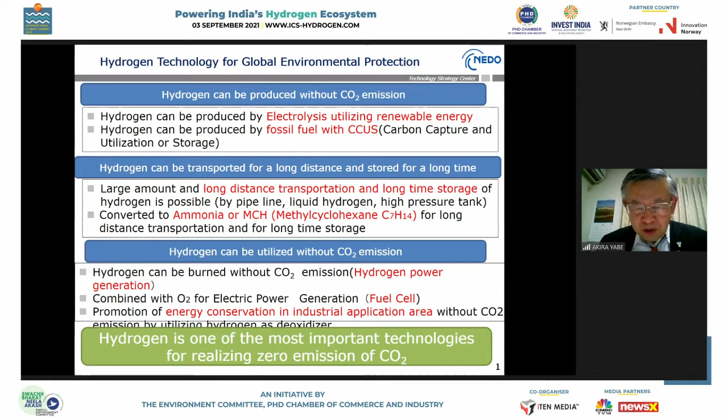Therefore, hydrogen is one of the most important technologies for zero emission of CO2.

This is an overview of hydrogen technology. Energy sources and production is the first one, and transport, storage and utilization. For production, fossil fuels and also renewable energies, and CCUS are very important factors.

For transport and storage, this is the main topic of today. Compressed hydrogen and pipeline is for a very short time range. Liquid hydrogen and organic chemical hydride, and ammonia, is for a very long range. And metal hydride is another application.

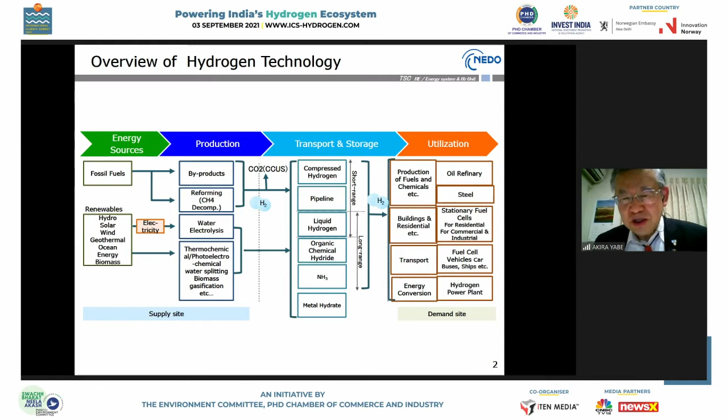I want to explain about the hydrogen strategy around the world. Basic hydrogen strategy was first established by Japan in 2017. That is very recent. And France, Korea, EU.

Germany, IEA publishes a strategy, and also India's powering India hydrogen ecosystem is today's topic, and the national hydrogen mission will be soon this year, I hope.

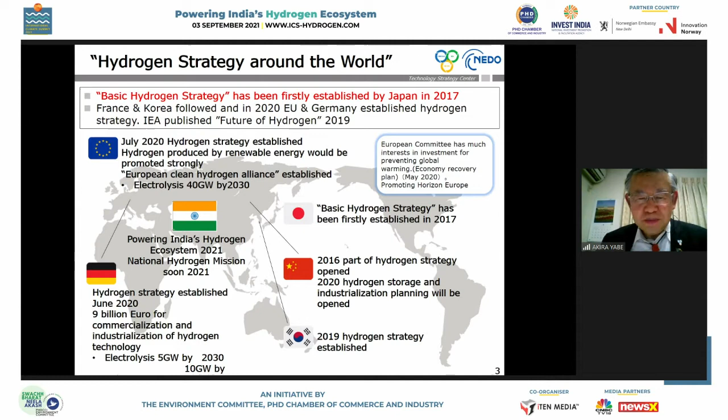I will start with hydrogen production without CO2 emission. The hydrogen cost varies greatly depending on technology and regional characteristics. Cost of renewable energy is a very important factor.

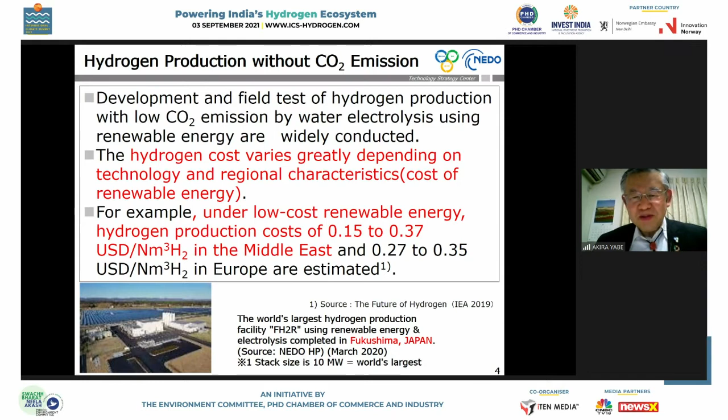Under low-cost renewable energies, hydrogen production costs $0.15 US per normal cubic meter of hydrogen. So in India, you will realize this kind of cheap production. In Europe, it's more expensive. For Japan, a little more expensive. That is the truth.

Transport and storage of hydrogen. There are several carrier candidates, extremely important for establishing the international supply chain of hydrogen. Long distance transportation is essential, and Japan has put much stress on developing these technologies.

Carrier candidates: liquefied hydrogen, which is 1/800th the volume of compressed hydrogen, with high purity - that has very good characteristics. Organic chemical hydride is another candidate, a liquid chemical product at room temperature and pressure, such as MCH, methylcyclohexane, is one candidate.

Ammonia is also another candidate. Higher volume hydrogen density is good, but it's not easily converted back to hydrogen because a large amount of heat is necessary for that. Pipeline is mainly for domestic transportation and is very important.

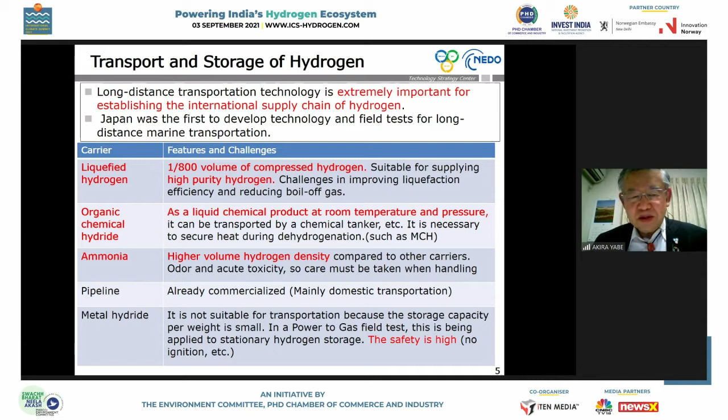Metal hydride is very safe, with high safety. It's good for buildings and for forklift mobility, which is good in factories. These are the candidates.

This is a project of international hydrogen supply chain that converts to hydrogen carriers. For example, overseas hydrogen resources - brown coal, byproduct, associated gas, or green gas - converted to hydrogen carriers such as liquid hydrogen or organic chemical hydride. In the Japanese case, liquid hydrogen comes from Australia to Japan, and organic chemical hydride from Brunei to Japan. These trials are under development.

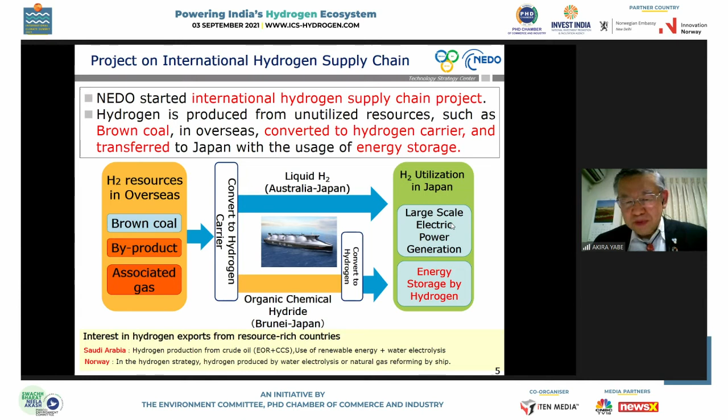Hydrogen utilization in Japan includes large scale electric power generation, and also energy storage by hydrogen. Hydrogen is very easy to use to store large amounts of energy.

It's a utilization technology of hydrogen. On the upper figure, demand for hydrogen is expected to grow rapidly by 2050. Japan has good hydrogen power generation technology that has been utilized through overseas projects for power generation. On the bottom figure, hydrogen power generation, fuel cell vehicles, petrochemical steel making, and also stationary fuel cells are very important. These are the very important utilization technologies of hydrogen.

Now, I will explain about energy storage more.

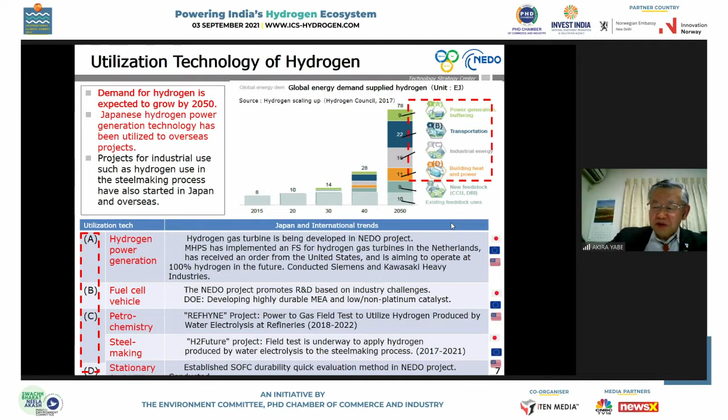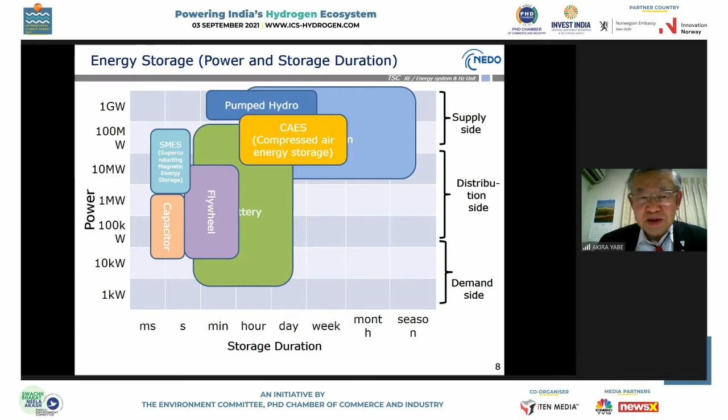I will explain a little about liquefied hydrogen next.

This is liquefied hydrogen. Density is very large compared to the hydrogen gas. And for liquefied hydrogen, latent heat and sensible heat of minus over 200 degrees is necessary. But compared to the caloric value, combustion value, it is only 4%. Therefore, not a large amount, but to make such a very extreme low temperature, a large amount of electricity is necessary nowadays. That is a difficult problem still.

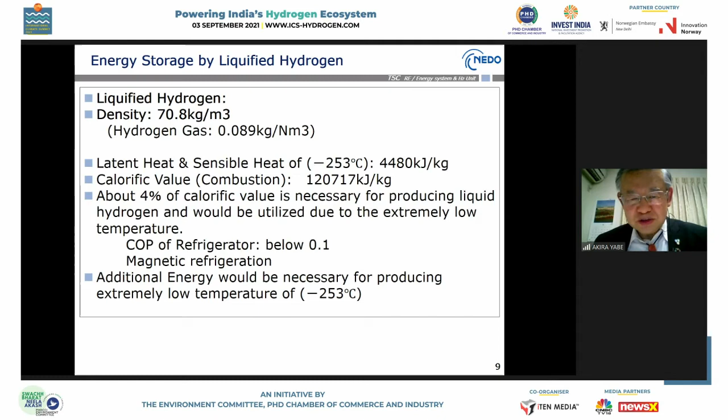Next one, please. And let's imagine the hydrogen production amount by photovoltaics. That is green hydrogen. Please imagine the 1 megawatt mega solar. Electricity generation is annually 1,000 megawatt hours. That means by use of electricity, hydrogen production rate is annually 18 tons. That is, for every month, 17,000 cubic meters. And as liquefied hydrogen, 21 cubic meters.

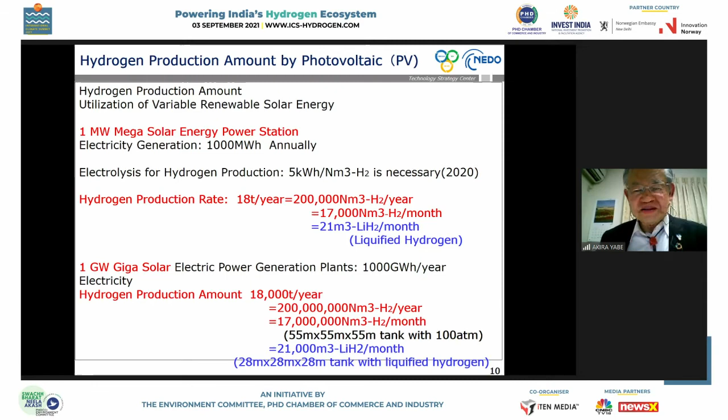And if you imagine 1,000 mega solars, that is 1 giga solar. That means you can see 17 million cubic meters per month. Imagine with 100 atmospheres, over a 55 meter cube is necessary. That is a very huge one. And for liquefied hydrogen, 21,000, that is about a 28 meter cube is necessary. That is more reasonable. And that is the image of hydrogen storage for 1 month. That is a very important characteristic of hydrogen. Next, please.

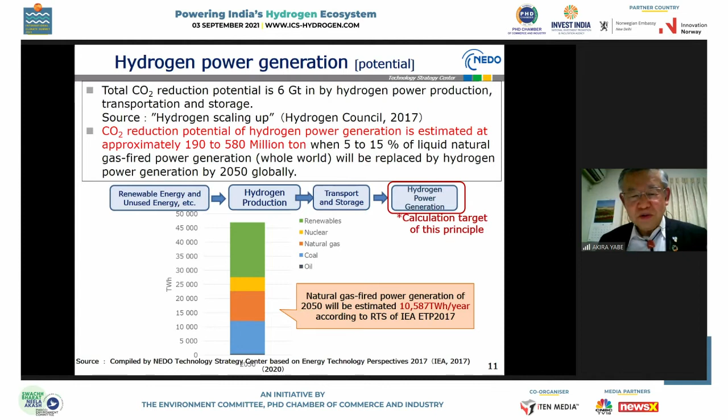Now, discussing the hydrogen, it's necessary to estimate how much CO2 can be reduced by utilizing hydrogen. This is a very important estimation. And in this case, by power generation, we can see about 190 to 580 million tons can be decreased globally. It can be estimated. And next one, please.

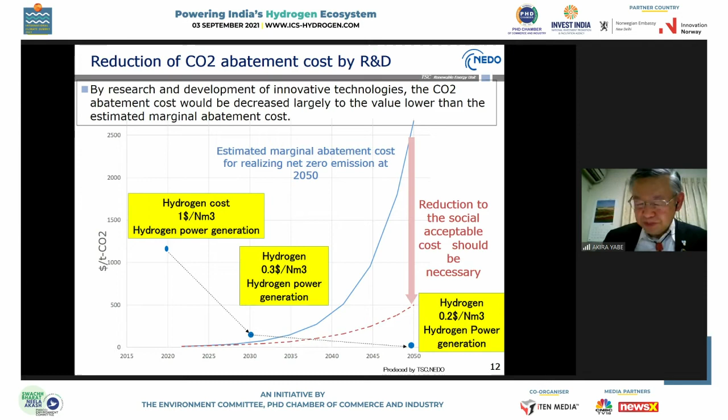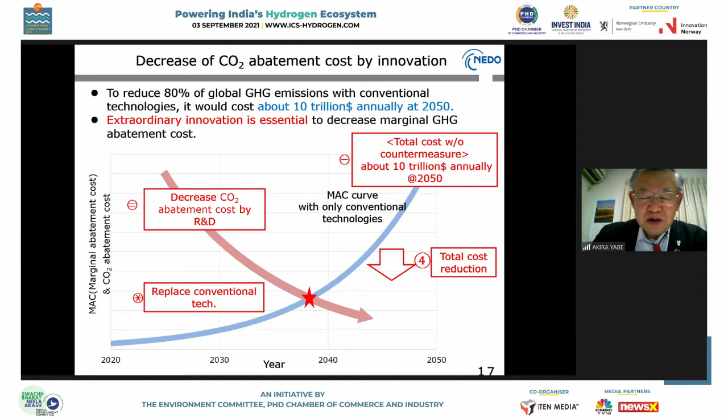Therefore, we should make the technology development to decrease the total amount of cost. That is about $10 trillion annually. That is a very huge one. Therefore, we should make much effort in research and development of various kinds of technology; especially hydrogen is very important to make the total cost decrease. Okay, next one, please.

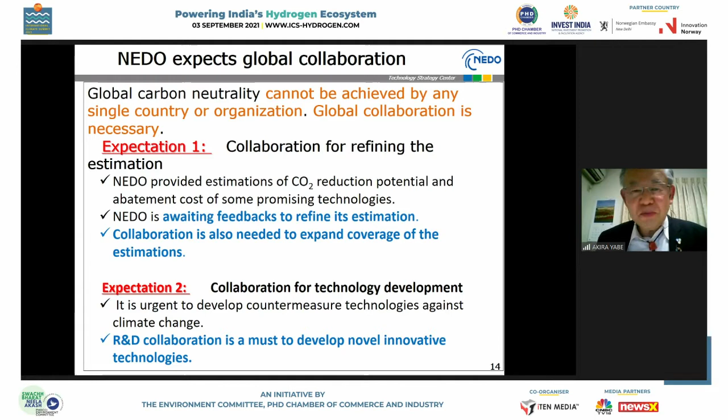And one message is, for that purpose, global collaboration is very important. Estimation of CO2 reduction and also technology development is very important for collaboration. That is one message from me. And the summary is the next one. Next slide, please.

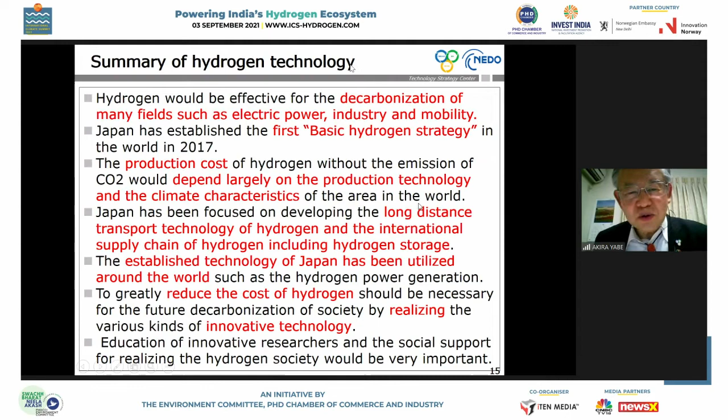Thank you, Dr. Akira. It's a good presentation. Can I ask you now? Yes, please. You are using all colors of hydrogen, not only green. So how do you address the climate challenge? Pardon? How will you address the climate challenge, for example CO2 emission, because you are planning to use all sorts of hydrogen? Yes, all colors.

Yes, that means two methods are very important: the renewable energy as much as possible, that is one, and also fossil fuels, blue hydrogen with CCS, is very important. These two should be developed in parallel. That is very important.

Okay. Do you have any storage cost comparison between your liquefied hydrogen and MCH and metal hydrides? Electrolysis is expensive, but does it come under $1 per kg? Yes, I explained there are three candidates, and that is not only storage but also long distance transportation. That is combined technologies. One method is suitable for one case, another one for another; that depends on the situation. Therefore, these three candidates have good solutions for each, I'm thinking.

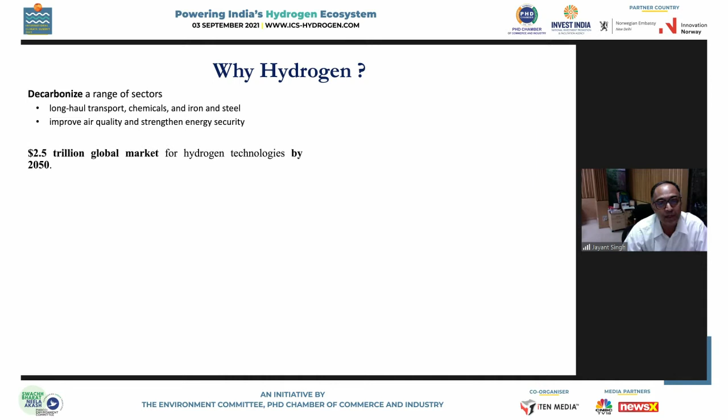So already the foundation of this session has been laid by Dr. Yabe. So I will just specifically address key questions related to materials, related to storage. Why hydrogen, we all know now, so I won't go too much in detail. One of the key factors driving this is CO2 emissions, and we want to decarbonize the sectors. And therefore, all across the countries have certain missions to accomplish, which is enhancement in the global market, and that's very clear. Existing growing demands are pretty much very well known.

Mainly it's ammonia which is being used, and that's why this is related to CO2 emission as well. But there are significant emerging future demands, which include transportation and certainly other kinds of applications.

Just a second. So sorry about that.

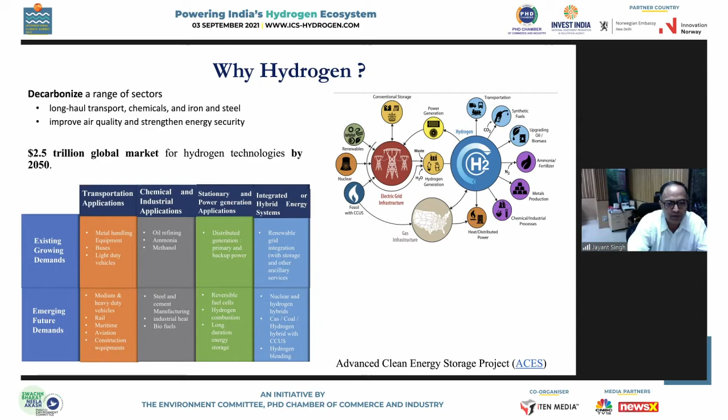Basically, across all this, one of the important factors when you talk about production, transportation, and the future needs we are aiming for, is to have the right kind of storage. And that has been the biggest challenge in the last so many years. Onboard storage is one of the classic issues; people have tried, but it is not yet able to meet the requirement to make it commercially viable.

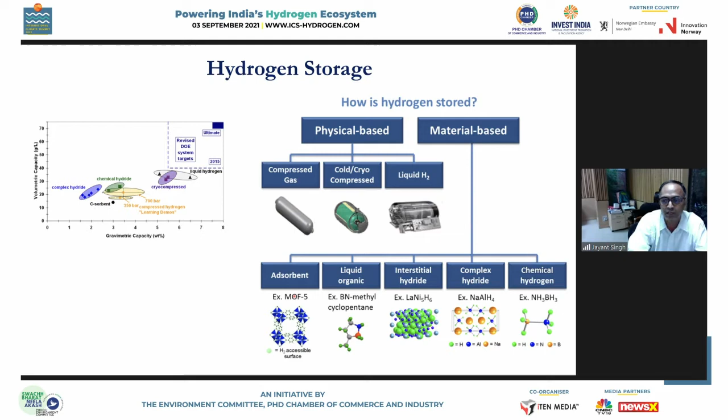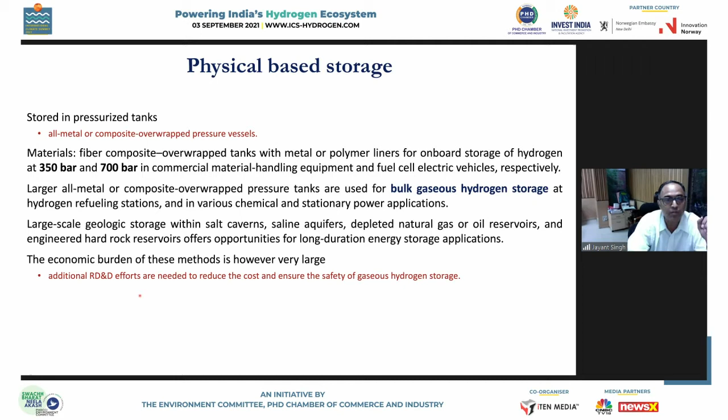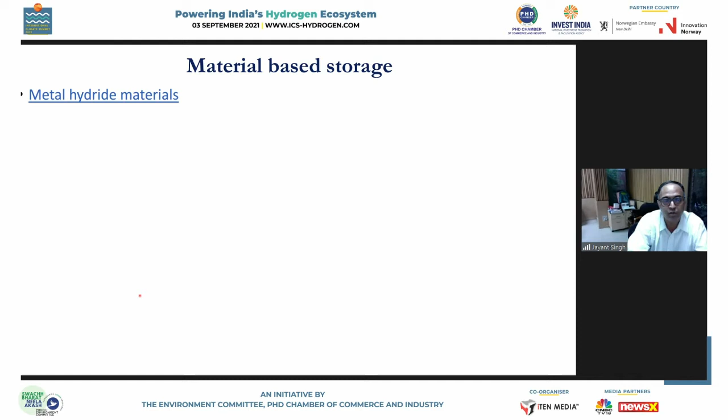So I won't talk much about physical-based storage. Of course, it is well researched, and additional R&D efforts are still needed to ensure its cost and safety. That is one aspect people are looking at, which is an immediate need. But then there's material-based storage, which is a long-term solution, particularly for onboard and many other portable applications. You can categorize it into three kinds of materials which are currently the hot materials. One is metal hydride.

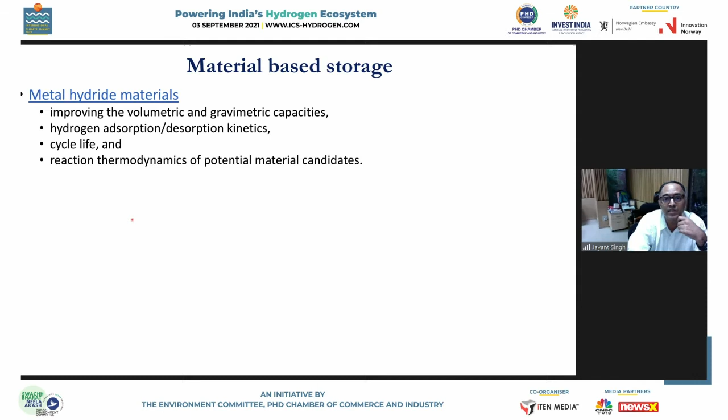The challenge here is to improve the volumetric and gravimetric capacities, and particularly the kinetics of adsorption and desorption, which is a primary concern. And of course, the other things are cycles and the reaction thermodynamics. Understanding that also creates new possibilities for controlling the whole reaction. Then there is chemical hydrogen storage. Again, similar challenges: improving volumetric and gravimetric capacity, improving transient performance, and particularly with a chemical, there is a release of volatile impurities, which is also a cause of concern.

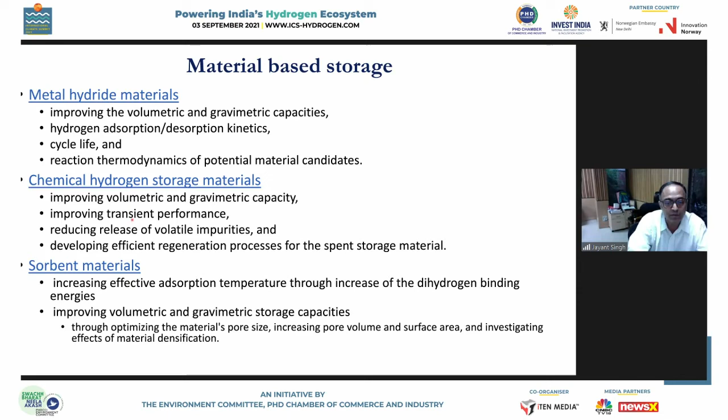Now, the third category is sorbent material, which is nothing but an adsorbent, and here temperature plays a significant role, because it is not chemical-based, it is physical-based, where strong binding is necessary, and that is where temperature plays a role. Again, the same issues are there. So in this case, mostly people are looking at different possible pore sizes and surface areas.

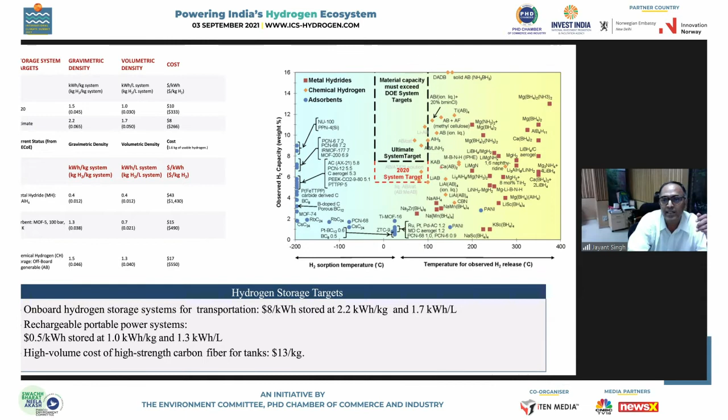So if you look at all possible combinations across, let's say, 400 of these materials, and plot them in terms of hydrogen capacity and temperature, the system target is somewhere here. Most metal hydrides lie much higher in temperature; though they have a higher capacity, they also have a very high temperature, which is not amenable to the practical conditions we want in reality. And then you have chemical hydrogen, which is somewhere here.

Some are very close, particularly if you look at aluminum hydride and so forth; these are very close to the realistic conditions. However, it is still far from the actual conditions, the system target. And then you have these adsorbents, which are of course at low temperature, though with very high capacity, but again the same issues are there. So these are the storage targets. I've taken it from

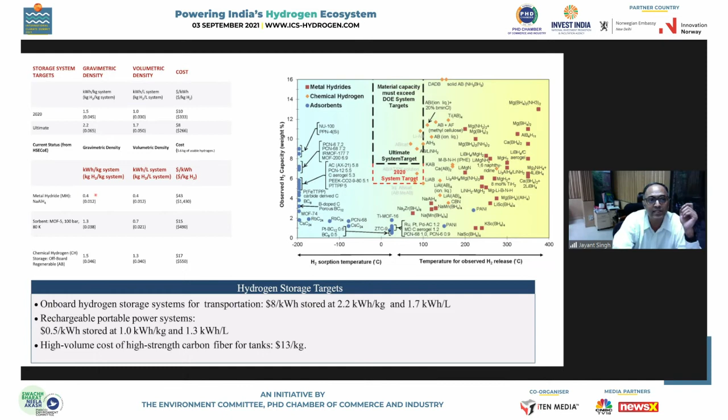the recent white paper. But you may ask the question, what is the cost? And you can clearly see the metal hydride per system is quite high vis-a-vis the sorbent and chemical hydrogen. So a lot of interest is there. However, there's still a significant challenge as of now. In terms of the challenges: weight, volume, efficiency, durability, refueling time, cost, and particularly codes and standards.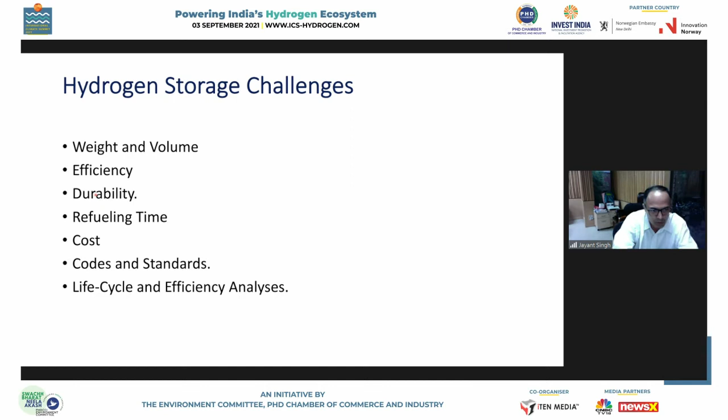Once you have it, you really have to understand the codes and standards so that it is interfacing with different units, particularly onboard and others. They need to be standard to make it viable on an industrial scale. And the life cycle and efficiency. These are the broader challenges one should look at, and perhaps more relevant from the industry point of view. So there's a lot of thrust because of the different streams of possibilities, some short-term, some long-term.

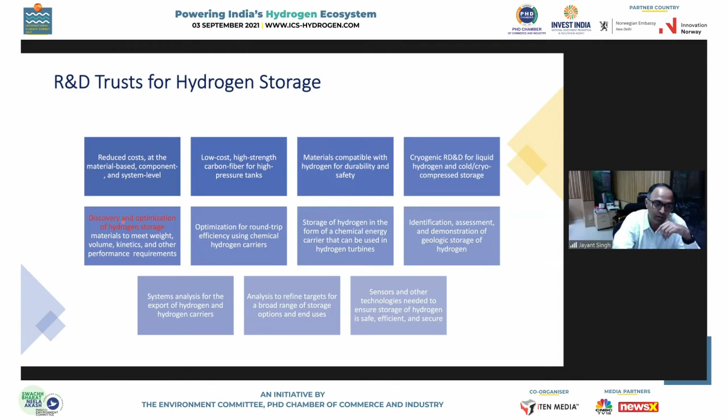But what my group is trying to do is look at the possibility of coming up with an automated way to speed up the discovery and optimization of hydrogen storage. This is where we have built or are building tools which can accelerate, with this Prescience Insilico which we work on. The idea is to use atomistic information of these materials and high performance computing. Before going to the experimental bed, one should have the possible combinations which can be realistic materials. This is where you bring the physics base, your quantum chemistry, the reaction mechanism, everything developed in silico, using these high-tech techniques to minimize the time to discover materials.

And I believe that in future we really have to use these things for accelerating the discovery of materials as per the requirements of the technology. So with that, I will stop. Thank you very much.

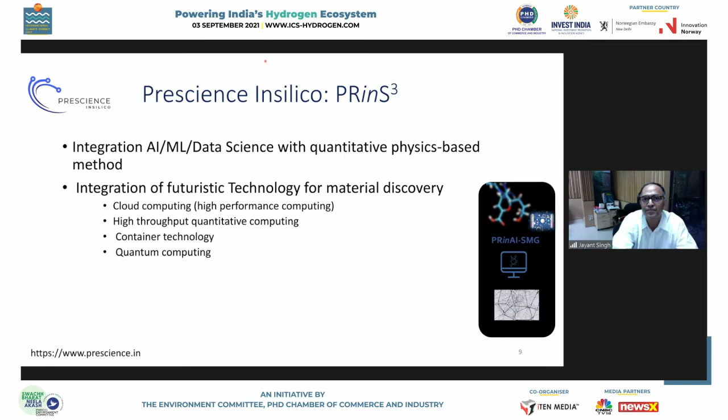Yeah, it is indeed a good presentation. There are a number of materials available in the literature, but accelerating that and high throughput is what is missing. So I think it's a very good attempt, and we need that in India at the moment. Hopefully many researchers will be interested in increasing the throughput of materials. In fact, DST has also launched a special program called the Material Acceleration Program. I don't know whether you... I'm part of that. That's very good, actually.

So now we'll go to the third speaker, and then we'll have a good discussion. Our third speaker is Mr. Ravindra Vasisht, Regional Director from Hexagon Agility, India. He's an electrical engineer and a postgraduate from the Institute of Rural Management, with about 36 years of corporate experience in sales, business development, and corporate strategy. He has wide industrial experience in food, plastics, automotive, healthcare, and defense, and about 11 years in natural gas and clean energy with Hexagon Agility. He has worked in reputed organizations like NDDB, Alfa Laval, Nipro, and Tata Group.

In Hexagon Agility, he introduced the concept of composite CNG and hydrogen cylinders to India, and the first CNG bus with a range of about 1,000 kilometers in India. He is a voracious reader and writer, with keen interest in defense, strategy and politics, a good sense of humor, and enjoys traveling. Let's welcome him to the ICS Summit 2021 to present his Type 4 cylinders. Welcome, sir.

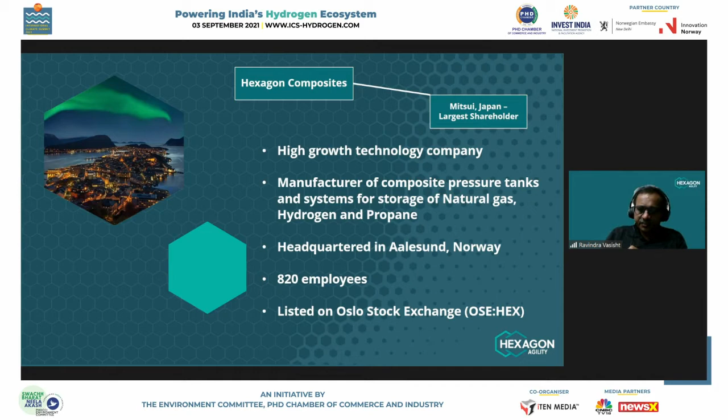If you look at our global business areas, we are into LPG cylinders, again with composites, then the mobile pipeline, which is for transportation of gas, light duty vehicles, heavy duty vehicles, and then hydrogen products, which have been used on applications like trains and ferries in Europe. And we have about 25 locations worldwide, including 10 manufacturing and assembly locations.

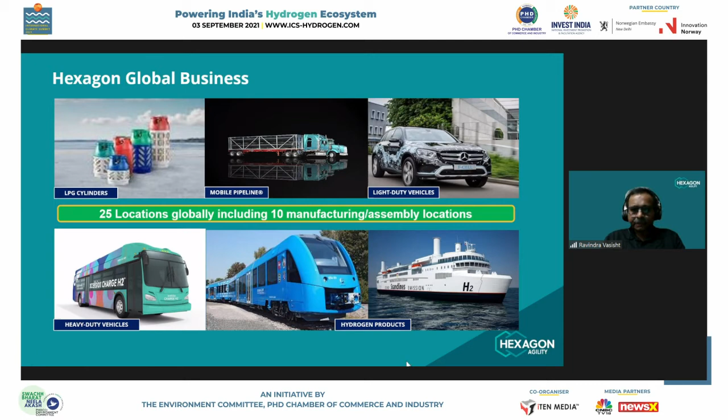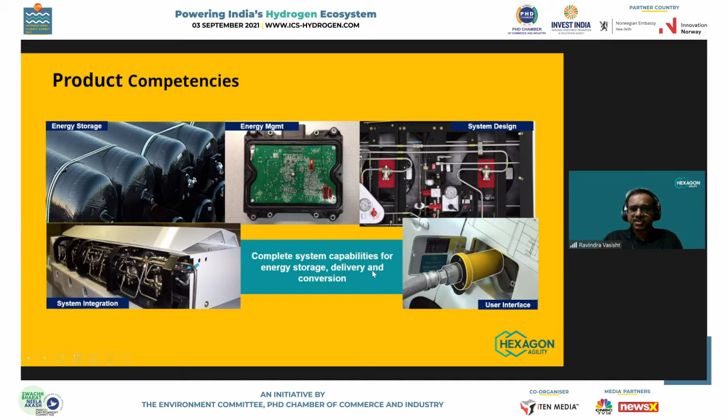If you look at our product competencies, it varies from energy storage to energy management, the system integration, the user interface, all of that. And we also have a complete system capability for the entire system solutions that a customer would require on any of these solutions that are used.

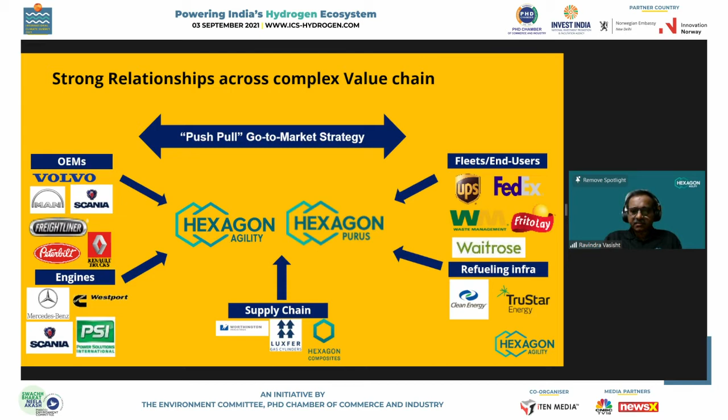Now, if you look at the kind of work that we do in the marketplace, we have a very strong relationship across a whole ecosystem where we work with OEMs, engine manufacturers, the fleet and end users, and also with the refueling infrastructure companies, because very often, even though my product is supplied to an OEM and used by a fleet or an end user, it is extremely important that it integrates into an operational experience in the field where everybody feels comfortable and happy. And that is where the work with the refueling infrastructure and engines and all these people comes in.

So if you look at Hexagon in the hydrogen chain, we are what I would call future ready. We have right from 950 bar ground storage capabilities to 700, 500, 380 and 350 bar in the hydrogen space. Though we do have cylinders of 250 and 200 bar, they're normally not used much for hydrogen applications. So it is 350 and above that really comes into play here.

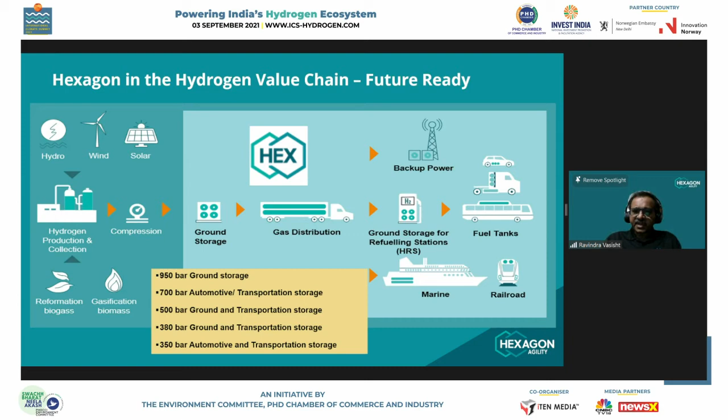Now, if you look at the Indian renewable energy history, prior to the 90s, prior to the liberalization era, India was one of the biggest in the world in terms of utilization of renewable energy. And since then, while a number of other countries have grown, we have actually dipped to a large extent for various reasons. And today, when you look at the new clean energy story, you have options like CNG, which is licensed. Then you have LNG, which is open to all without any licensing, but only for automotive application. Hydrogen and electricity are again open to all, barring statutory applications and requirements.

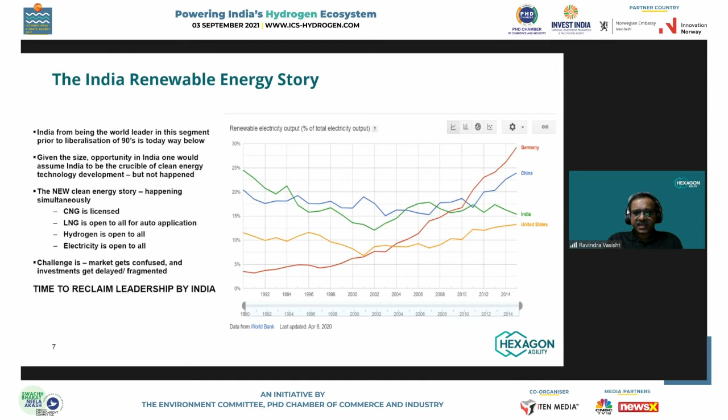So the challenge in the clean energy space in the country today is that the market is slightly confused, and investments as a consequence get delayed and fragmented between various options out there in the market, because almost all of them are being pursued with equal vigor, if I may say so. And I think it's now time for India to reclaim the leadership globally in terms of renewable energy usage.

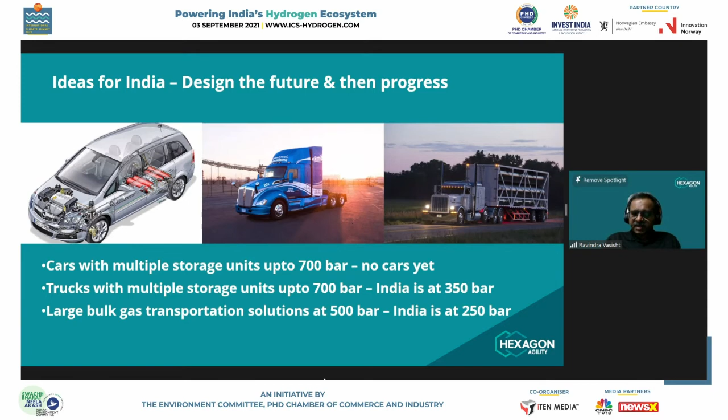Large bulk gas transportation solutions, which you can see in the last photograph on the right side, could be at least 500 bar, but India is still at 250 bar in terms of what is used in the field and encouraged. Now, between trucks and buses, while both of them are options, the reason I have taken a truck is that replacing one long distance truck, even with natural gas, I'm not even getting into hydrogen, means 20 cars are removed from the road in terms of emissions. That is the kind of emissions that a truck would emanate.

So what a truck would need is range, and range means storage, and storage obviously means space on the truck. And that is where we come up with a lot of innovative solutions. Like if you see the one on the left, the storage solution is right at the back of the truck.

Then I've shown you the figure of how this back of the cab storage looks like. And then this is a photograph of Hyundai, where again they have it at the back of the truck, but integrated in such a manner that it is completely hidden and not easily seen. Now, these kind of designs allow a truck to travel as much as 750 kilometers range.

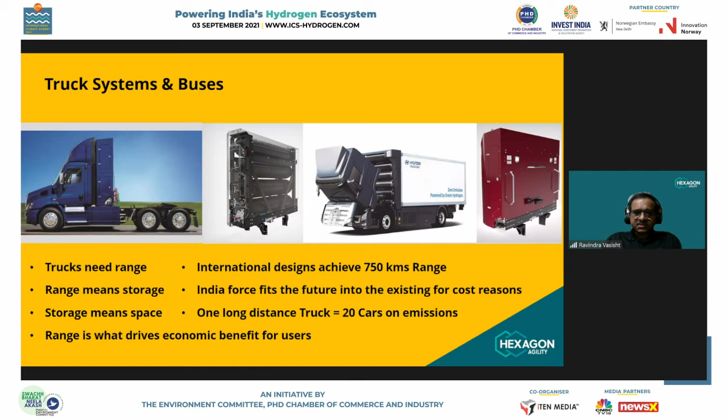And that is what is crucial in the Indian context, because there is no point in trying to say that you're going to have something that is just a few hundred kilometers and then have a refueling infrastructure that is required. Whereas it has to be an alternative to diesel for a user experience to be interesting and attractive. Now, what happens in India is that we force fit the future into the existing for cost reasons, and that often becomes the stumbling block in progressing as fast as we can, actually speaking.

Now, if you look at what is done globally, these are all solutions that we have provided. Whether you look at Mexico, Israel, Vietnam, Malaysia, Thailand, which are some of the countries being much smaller than us, they use very, very large units for transportation, whereas we still use very small units, as you can see in the picture at the bottom right. So the limit in India for transportation of gas is today about 9,900 liters water volume totally, whereas globally, they look at 40,000 liters plus. Now, the moment you move to something like 40,000 liters plus, your cost of transportation comes down drastically, and it makes a big impact economically for any user when transporting gas.

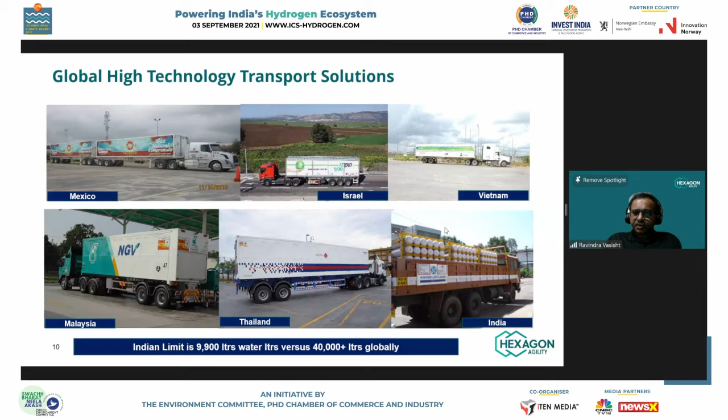Now, the factors that drive the design of a storage system for any customer is, of course, one is the weight, depending upon whether it is on road or whether it is on the land, the amount of storage that they would require. Then the application and usage, where are you going to be filling it into a truck? Are you going to be doing whatever it is with it? So that is another factor. And the entire flow chain from generation to application has to be mapped out.

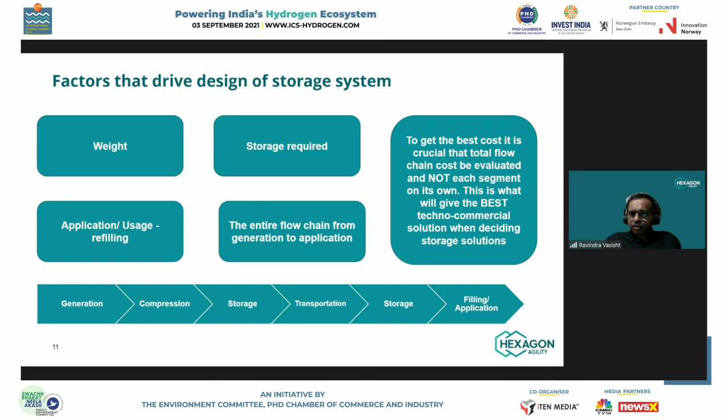Now, the reason in the case of hydrogen that this is crucial is that if, let us say, you have a requirement of 350 bar on a truck and you are able to transport or store it at 500 bar, then the amount of compression or lack of compression requirements at the point of filling becomes very different when you have, let us say, storage at 250 bar and then you have to dispense it at 350 bar or maybe higher. So one needs to balance the costs between what it would cost for a compressor, what it would cost for a dispenser, and what it would cost for storage and transportation, which will then give you the best option of transportation in terms of either it is 350 or 500 or 700. And that is very crucial for any project to be successful economically.

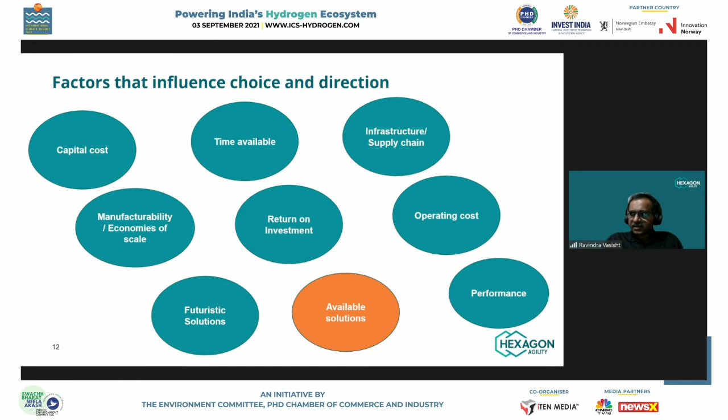Now, the various factors that influence this decision is, of course, your capital cost, manufacturability, economies of scale, the return on investment, performance, the infrastructure available, and then, of course, the time to market, depending upon the demand that is there, all of that. Which leaves us with two things. One is you have available solutions, and then you have futuristic solutions, a lot of which the speakers before me have spoken about and are going on. So what I'm talking about is the available solutions that are there in the market and being used since long. And that is the type 4 composite cylinders.

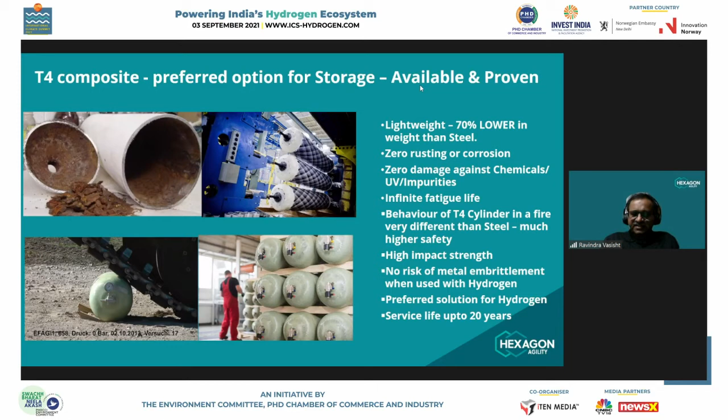Now, these are not only just available and proven, they are lightweight, 70% lighter than steel. There is zero corrosion or rusting, infinite fatigue life. So there is no question of metal embrittlement that could happen here. And in a fire, the behavior of a type 4 cylinder is very different from that of steel, and to that extent, offering a much higher level of safety. And as you can see, the strength of a composite cylinder is such that we have even run a battle tank over it without it becoming pieces or whatever. That's the kind of strength it has.

Now, one of the other aspects of what I would call as a fact of life coming from the industry is the users are not trying to save the planet, but the government would like to save the planet with a lot of policies and programs, while the investors who become the bridge between the users and the government, they need to meet the user demands and the shareholders' demands in terms of the return on investments and what they do. So all three different levels of interest need to converge.

And what we feel from a convergence of interest would be a kind of a financial, where it could be maybe taxes, duties, subsidies. Second, which is more important to us, is the statutory aspects, wherein the new that is offered cannot be judged by the existing laws or systems, as a consequence of which, like I said, it becomes that much harder to jump the hoops.

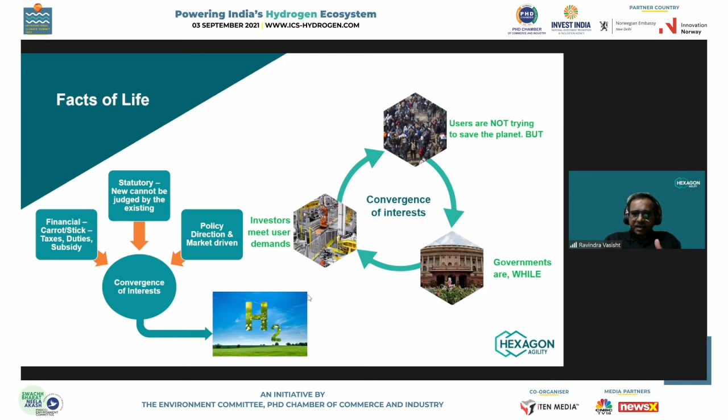And the third is allowing a policy direction and letting the market drive this going forward, depending on wherever the money flows in, wherever the performance comes in. So this is a very quick and short presentation about what we are, and that's about it.

Thank you, Dr. Ravindra. It's a wonderful presentation, and you exactly said the words like the market is a bit dilute, and we are confused what to do. There are many options and we have to finalize that.

That's really interesting. One thing I'd like to ask is, you are concentrating more on storage of hydrogen in type 4 cylinders, but are you not looking at ground storage? Because a lot of renewable energy is getting wasted, and the battery also cannot take that much power. So the only way is to go for hydrogen-based systems.

See, composite cylinders can be used either for ground storage, for transportation, or for onboard applications in an automobile. So you have all three options available with composite cylinders. Yeah, but the thing is it's very expensive. I can afford to use it for transportation applications, but not for ground storage.

Well, I do understand, but the option you have today, steel, is so heavy that sometimes even for ground storage it can have problems. For example, in a particular project we are talking about now, the size of steel cylinders is limited, whereas we can have very large sized composite cylinders, each about 8,500 liters water volume, which will reduce the infrastructure required in whatever you're setting up, and because of the lighter weight...